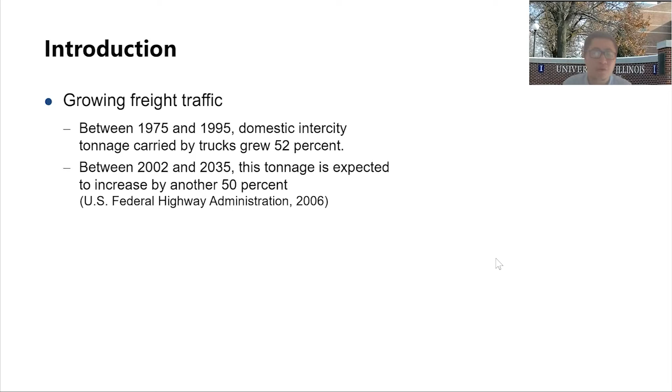We all know that freight is important, not only because it's related to our daily life, but because freight transportation has a lot of externalities. It does contribute to the congestion that we experience every day, and it has safety implications as well.

We see mixed traffic between trucks and other private vehicles, and particularly freight has a significant impact on infrastructure. This is something that's very distinct compared to other types of transportation, where freight vehicles are generally heavy and have a huge impact on infrastructure. The sustainability and durability of our infrastructure systems highly depend on freight transportation.

And of course, freight transportation is a major emitter of pollutants, and actually makes the most noise in transportation. So with all this, we want to have better freight systems in our lives.

Just to put things into context, we look at planning freight distribution networks. Generally, the freight transportation system serves the purpose of meeting supply and demand. Essentially, we try to bridge the gap in between over time and over space. This involves very often several layers of transportation.

One layer has to do with essentially the line haul part. Those of you familiar with logistics and freight planning would understand that it's often efficient to have a hierarchical system for freight distribution, where we use bigger or larger vehicles and more efficient modes to do the line haul part with long distance travel, which reduces the cost on average for overcoming long distance.

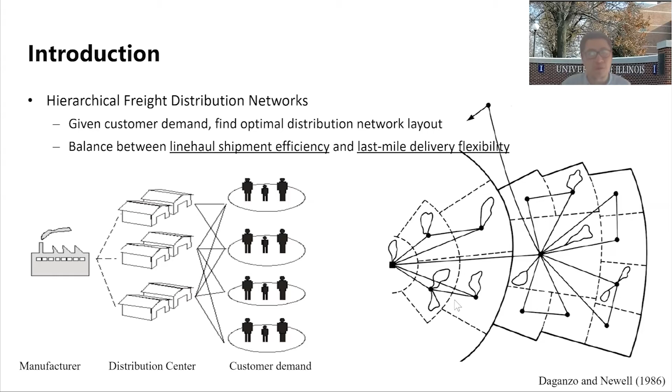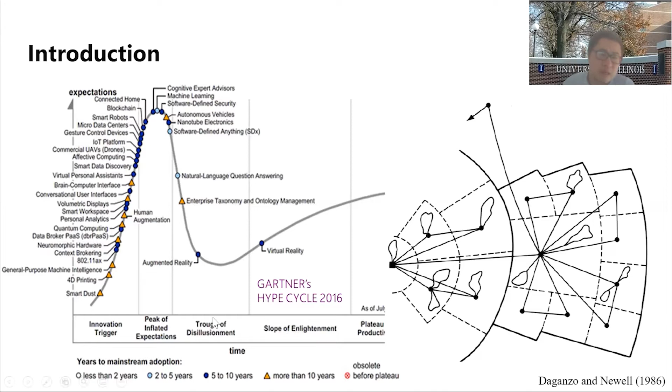But then there are the emerging revolutions and technologies that we've been seeing. There are a lot of technological advancements in recent years, and the freight industry is being revolutionized in a sense. We have technologies, for example very much related to our CCAT consortium here, such as autonomous vehicles being tested and deployed in the field now.

This particularly leads to revolution in the freight industry, particularly regarding autonomous trucks, and many companies are currently testing these technologies. Autonomous trucks, as we will see in a moment, have significant impacts on the freight industry regarding efficiency, sustainability, cost, and so on.

So this is one part of the system that we want to discuss here: essentially how this emerging autonomous trucking technology would have an impact on the line haul part of the freight distribution network, and how we are going to be able to design the freight distribution line haul part under the consideration of platoon transportation.

Then another part of the technology that's really having a direct impact, and that a lot of companies are testing, is commercial UAVs, or otherwise called drones. Using drones for commercial business essentially provides another way of delivering freight to customers, overcoming the last mile flexibility requirements.

And particularly in urban settings, when we have a lot of congestion on the surface streets, drones provide another way.

Particularly in rural areas, using huge vehicles to travel around to provide the last mile delivery is costly and inefficient, so drones provide a very nice alternative. These two technologies go hand in hand - they are not separate. There has been a lot of work regarding how we use autonomous trucks to do the line haul part, and together redesign the whole platoon and distribution network, such that we accommodate the emergence of drone delivery for the last mile. So this can be planned simultaneously.

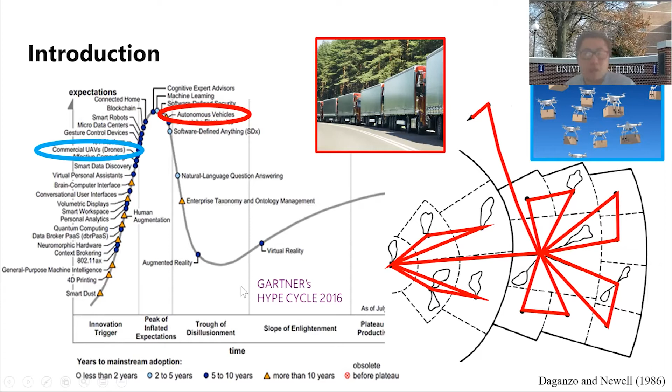This is the major focus of our discussion today. So a little bit about what we're going to do in the next half hour: we'll talk about the line haul part, how the research team here at UIUC has been working with everybody else to improve the line haul shipments of our truck platooning. I will start with a brief overview of the benefit and cost of truck platooning, some work we've been working on for a couple of years. Some building blocks were already covered last year in this conference, but hopefully that sets the foundation.

So we'll understand the benefit and cost of truck platooning, and then some recent work regarding how we plan the network of truck platoon lanes - essentially dedicated lanes for truck platooning, a network design model. To do that, we need to understand the generalized link cost function, essentially putting all the costs associated with platooning together into a unified framework, and use that as a building block for the network design. This is some of the work we've done recently.

Simultaneously, we've been doing some work about the last mile, the UAVs, and essentially the benefit and cost, some of the models we've been building, and particularly the energy analysis we've been doing. So this is the outline of today's work.

Next, I will briefly review some of the earlier work done by myself and my colleagues here at Illinois regarding the benefits and costs of truck platooning.

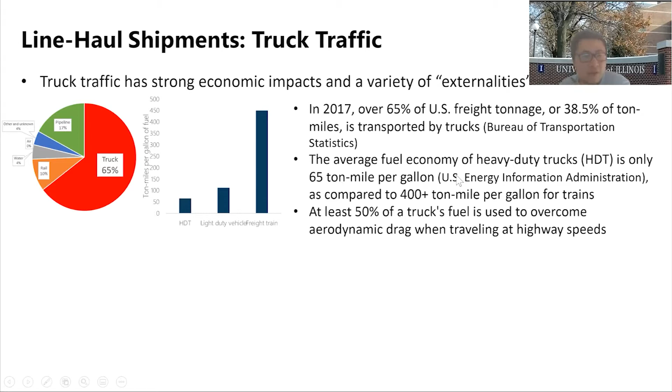Another thing particularly interesting about trucks is that they have a huge impact on pavement infrastructure - very different from passenger transportation. Truck traffic in the United States forms about 11% of traffic volume, but causes over 99% of roadway wear and tear. This is interesting because someone who took Pavement 101 would know that axle load damage to roads increases with the fourth power of the load value. So a 10-ton truck is actually 160,000 times more damaging than a passenger car - it's blown out of proportion. Trucks are the dominating factor for roadway deterioration.

So as you can imagine, as our freight continues to increase, one of the big impacts is on infrastructure damage.

We started looking at this problem many years ago at a conference, where local agencies near O'Hare, near their intermodal terminals, complained about how quickly their pavements get damaged by all the truck traffic near the railroad yards. Every 2-3 years they have to repave the roads because they get damaged so quickly.

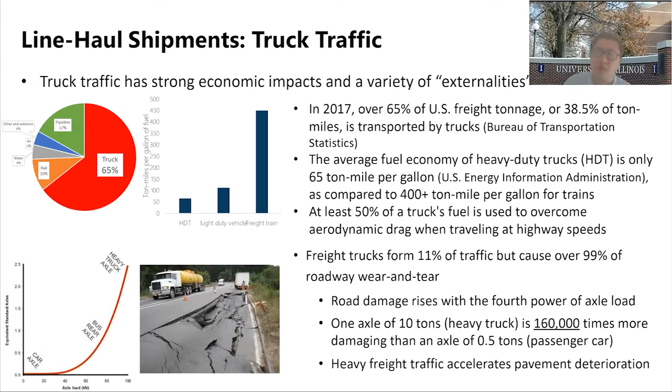As I hope this slide shows, there are two major factors we're going to be considering here: one regarding energy consumption related to truck traffic, and another related to the infrastructure damage truck traffic imposes on our society.

So a little bit about the revolution we're facing here. We all understand these impacts from truck traffic, but now autonomous and connected traffic is reshaping the landscape, particularly in the line haul part, where truck platooning is becoming an opportunity for us to improve performance—and potentially a curse as well. We'll talk about that in a moment.

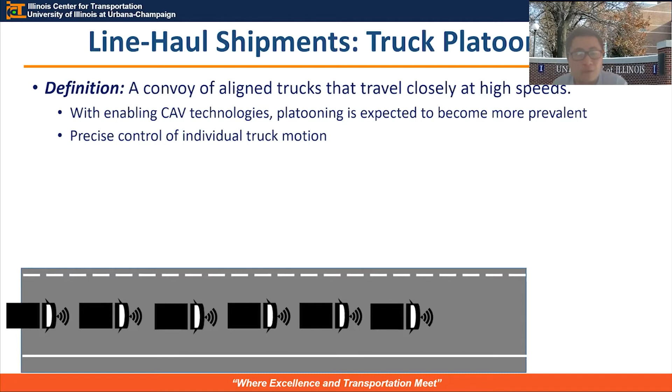Truck platooning—I guess everybody knows well what it means. It's essentially truck traffic vehicles getting together, with the help of information technology and autonomy, getting closer to each other with very close spacing and temporal gap or clearance. Then they travel together almost like a train. The benefit of this, obviously, is first of all that we can do it—we now have the capability of putting trucks together in a very close range, compact convoy, and they can travel at a higher speed.

Without human intervention or human error, traffic actually gets improved in some sense. As you can imagine, vehicles still travel at a very high speed even if density is high. This defies the traditional fundamental diagram where we'd normally anticipate people slowing down when they see a lot of traffic around them. So this is one potential improvement we see, and there are also safety implications from that.

But another particular benefit from truck platooning is the potential of lowering fuel consumption and emissions. This is due to aerodynamic drag—when vehicles form almost like a compact train on the freeway, the air drag gets reduced.

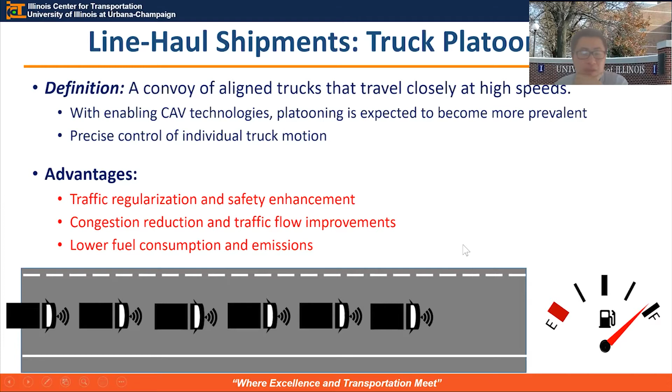This is some of the earlier work we did almost 2 years ago, regarding how we can understand the impact of trucks forming a platoon, and how energy consumption depends on the spatial gap between vehicles—our spacing between vehicles, and also potential lateral displacement. If vehicles form a perfect convoy with perfect alignment, there's a certain air drag. But if there's some lateral displacement, what is the air drag then, and how does it change according to the location of the vehicle in the platoon?

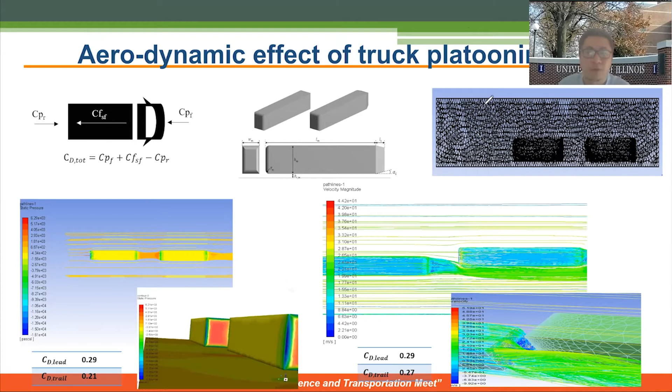So we built finite element models to try to understand air drag, sort of a fluid dynamics modeling here. This is earlier work we did 2 years ago, and we were able to put things together to understand this—I hope I have some animation, but maybe it's getting slow.

Essentially we try to understand, under any arrangement of trucks in a platoon, how the air drag depends on the organization, or configuration, of the platoon—how much spatial gap we have, how much lateral displacement we have, and how large the platoon is, meaning how many vehicles we put in one platoon.

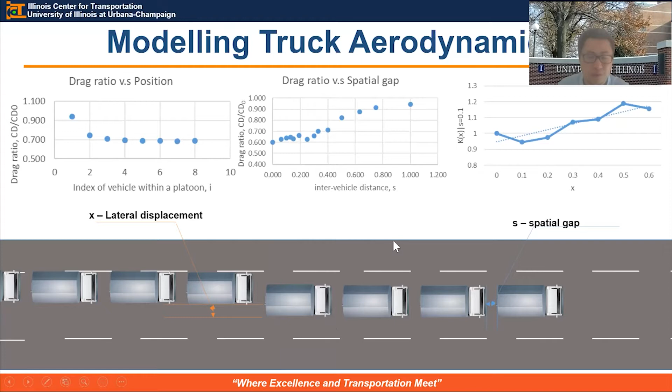So this is one part of the analysis we did—a review of earlier work. We found out, from the literature and also from our own research, that there is a significant amount of fuel saving opportunity from truck platooning. This is great because, as we said, air drag is more than 50% of fuel consumption for trucks, and trucks are a big consumer of energy in industry.

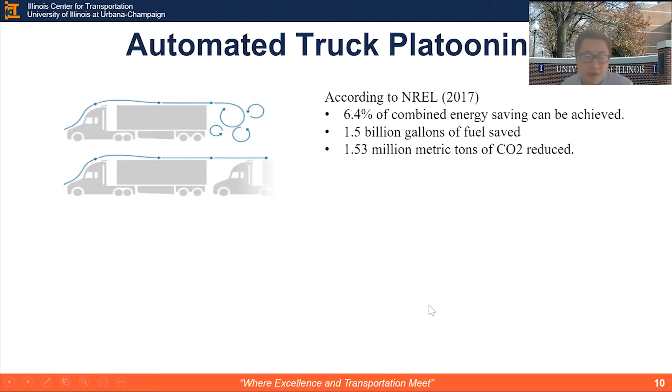But then there's no free lunch. I think platooning actually has the advantage of energy saving, but it does have damage to the pavements. As you can imagine, the damage accumulation depends on the loading frequency and loading concentration. This is a picture to show what we may expect in the future, especially when platooning is really widely accepted.

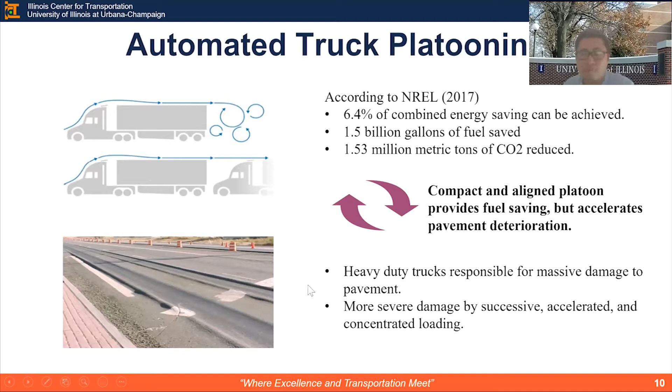If we are not careful, the pavements get damaged very quickly. This shows very significant rutting along the wheel paths of trucks. So our colleagues in pavements have already been doing a lot of work in the past two years to understand the impact of truck loading patterns on the pavement, particularly in light of autonomous trucks and platooning, compared to human drivers.

With human drivers, we cannot really tell the drivers to stay even inside the same lane, so laterally the loading points are going to be a random distribution. The truck can be anywhere in the lane.

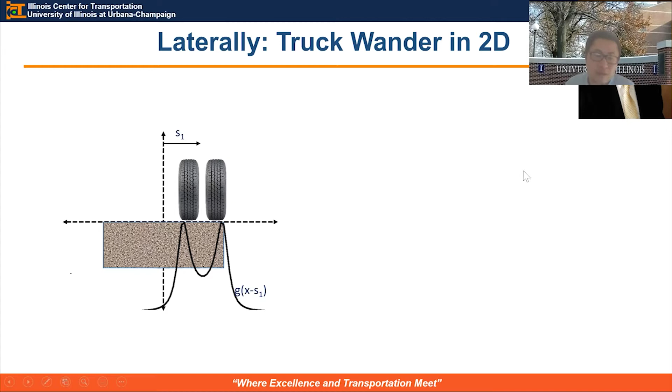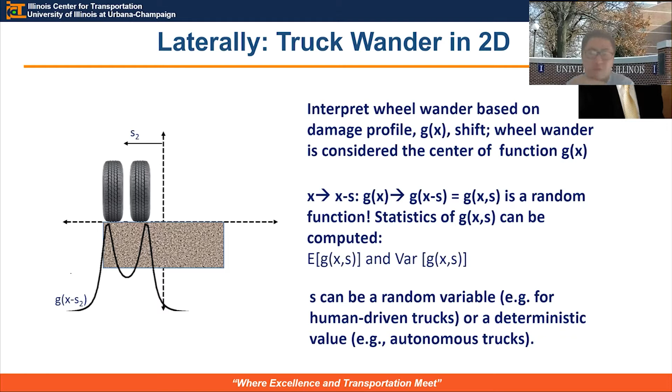But with autonomous and connected trucks, we actually have more precise control of where the lateral loading points are going to be. Dr. Al-Qadi and his students worked together to understand, under different loading patterns and lateral displacements, under different schedules and frequencies of loading, essentially how close each truck is, how compact the truck convoy is. They developed finite element models to understand how the loading of trucks in a platoon impacts pavement damage accumulation over time and space.

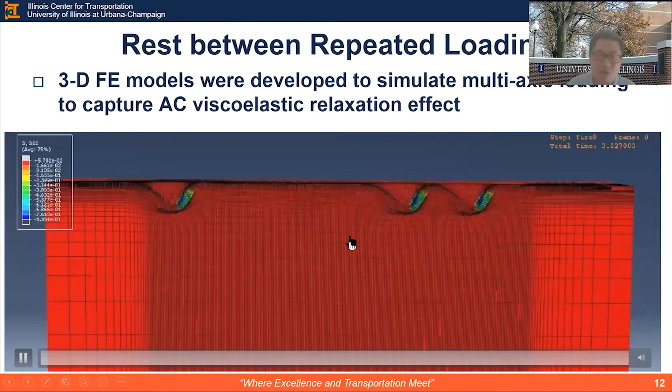So essentially this helps us understand the damage to the pavement. Our colleague Hassan Ozer has also been particularly focusing on this—research we've done in the past year or so—regarding how, as trucks get closer to each other and travel at higher speed, the loading frequency gets improved. But actually that's damaging for the pavement, because the pavement no longer has time as a viscoelastic material to relax and recover from the load.

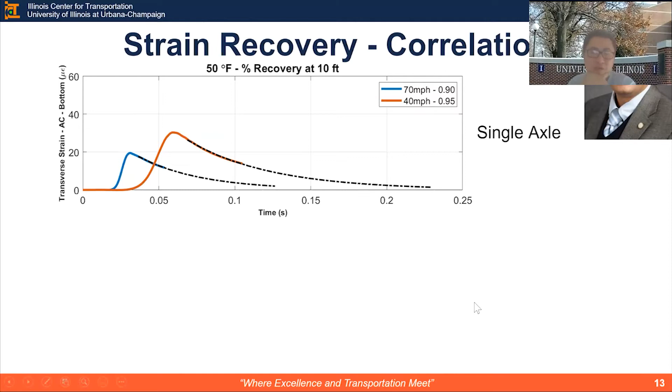This more frequent loading from platoon trucks is essentially going to cause faster damage to the pavement due to reduced recovery time. They've done both modeling and experiments to try to understand these impacts.

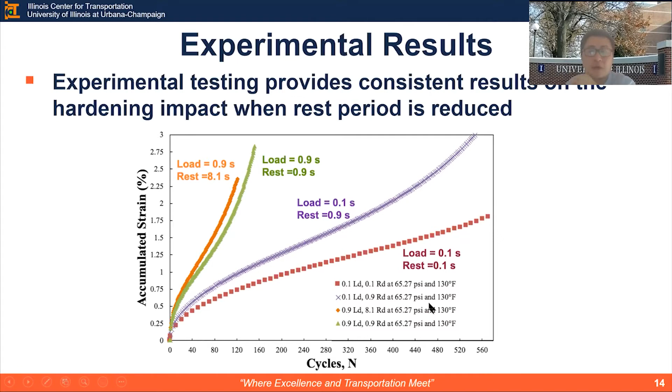And then finally, my colleague Jeff Roesler—I think he made a presentation earlier more about this work, so I'm only going to have two slides here to talk about what he did. He has been particularly focusing on how we can build new types of pavements, embedding instruments inside the pavement to help platooning, so that the infrastructure can communicate with a vehicle as it passes by.

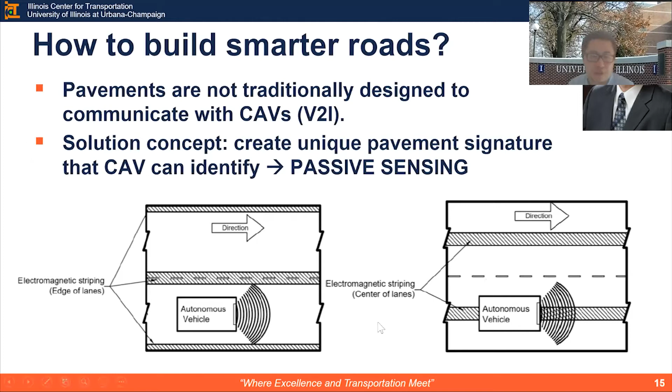This is just to show a bit of what he's doing. He put electromagnetic signatures in the pavement so that vehicles, when they pass by, can have certain guidance. His work in the lab really gave us some ideas about how, if we were to convert existing pavement lanes into truck-platoon-capable ones, and how much the conversion would cost. So we get data from them through this work.

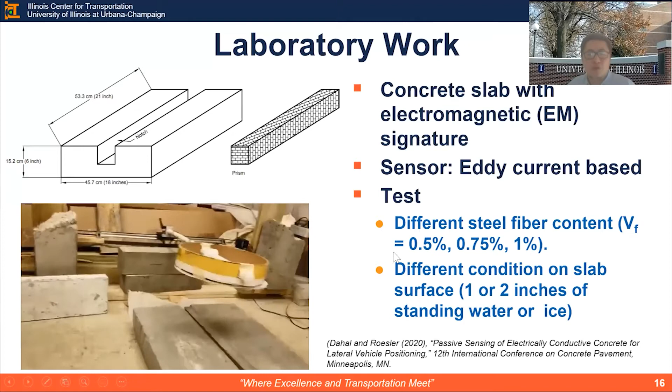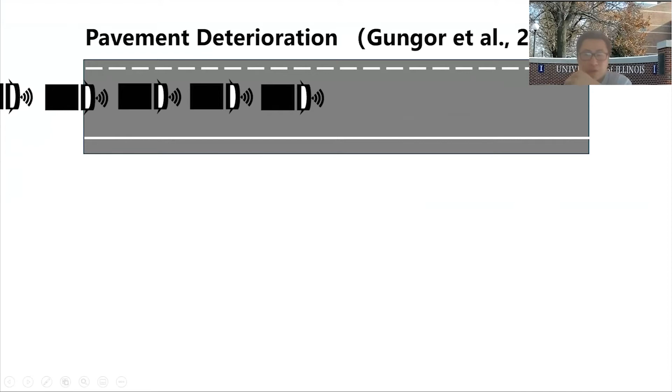With all this work from my colleagues, what we were trying to do is get a complete understanding of pavement deterioration under truck platoons. For any truck loading pattern configuration, we're able to understand the progression of distress development and how the pavement is going to deteriorate, giving us this deterioration function.

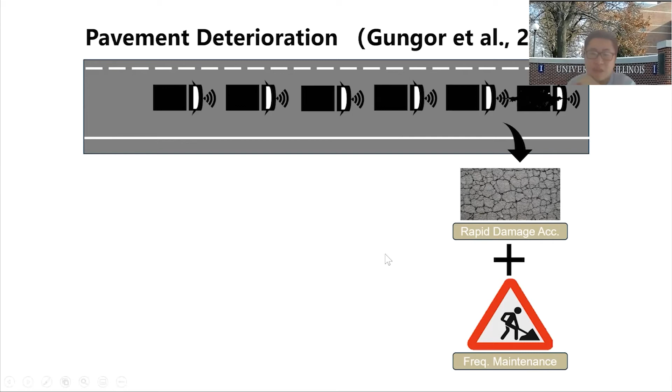We'll be able to put this into a pavement management model, so we can understand how we must do maintenance in order to maintain the state of good repair of the pavement facilities. Together with this, we understand that pavement condition and air drag—remember, fuel consumption—have an impact on the user cost.

So just talking about all these things together, we're able to put all these components together into this pavement lifecycle cost and actually system-wide lifecycle cost assessment framework. We are able to understand essentially how platooning, with or without platooning, then how much is actually really the life cycle cost implication of what we do.

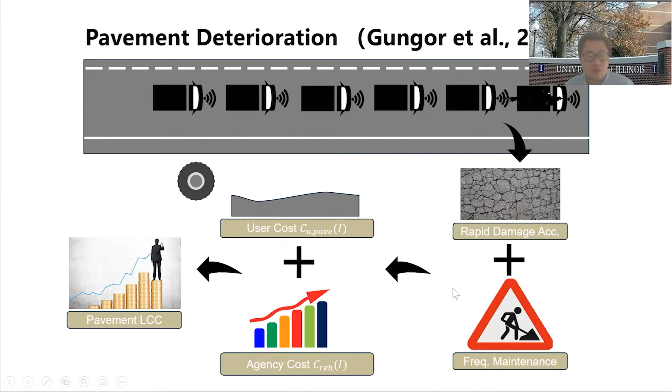So what we do here now, so far we have been talking about the review of a previous work. Some of these slides have been covered in the previous year, but now in the past few months and almost a year, what we were doing is trying to put all these pieces together with our better understanding of the energy efficiency and better understanding of the pavement impacts. We're trying to put together and see how we really can utilize all this information we obtained from our team's research.

We're trying to develop and plan the infrastructure or the network for line haul shipments, and particularly to accommodate truck platooning. So this work is particularly trying to build a network design model to try to see where in an interstate highway network we can actually build dedicated truck platoon lanes. I'll talk about why we dedicate truck platoons in a moment, but generally this is the type of infrastructure where the platooning benefits could be maximized. Anyway, we'll see that in a moment.

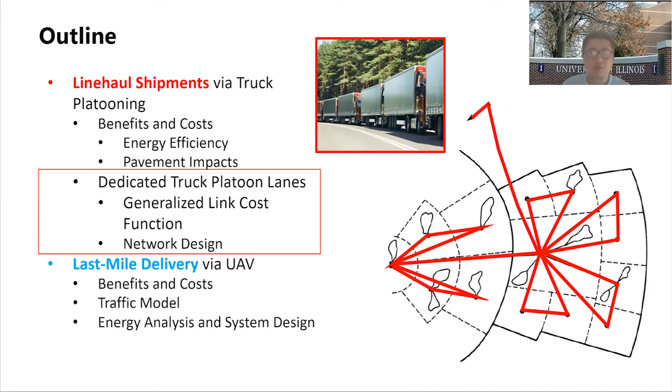So with all the research that we have been reviewing earlier with the work from our pavement colleagues, and regarding air drag and so on, we were thinking about how the system is going to work in the future with truck platooning capabilities. What we are trying to think is that we would like to in the future allow a certain highway link to be essentially converted into a truck-platoon-capable link.

Essentially, we were thinking about how we can actually, for any given traffic flow pattern, find out the best way to do the truck platooning, such that we minimize the overall cost, the life cycle cost regarding the energy consumption and the infrastructure impact.

So what we're thinking first is maybe the public agency is going to come up with this sort of truck platoon configuration, where periodically the highway agency is going to look at the condition of the network regarding the demand and the pavement condition and so on. Then they will come up with a plan regarding a certain roadway link, how the link is going to be operated, and what type of platoon configuration is going to be used.

And meanwhile, the agency is going to actually do pavement management, regarding the rehabilitation and repair of the pavement as traffic becomes intense. So the current setup is the following.

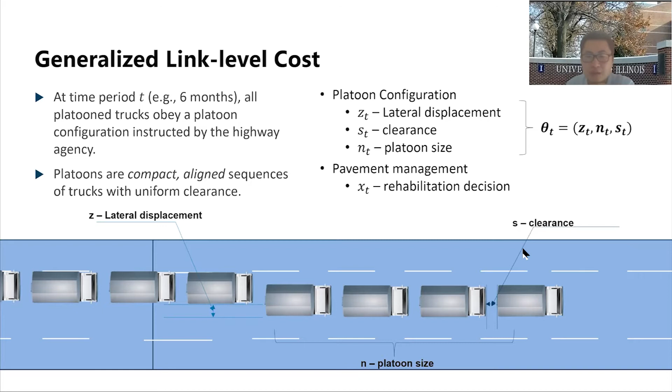So we can partition the lane we build for truck traffic into multiple discrete displacements, and the trucks essentially form a cyclic pattern as they travel. One platoon is here, another platoon goes there, and then they rotate. Essentially we have one platoon going like this, another going like this, another going like that, cyclically, then we come back to this side and do this again. So this is our assumed truck platoon operation plan.

This operation allows the pavement to have a rest period in a way. We have a platoon adding load to this area, and then the next platoon goes somewhere else, letting the pavement here rest a little bit. This is essentially the strategy we propose here.

This platoon configuration is going to be described by the lateral displacement, the clearance—essentially the absolute distance between the trucks—and the platoon size. We use the theta vector to indicate that. We assume this type of control of the platoon is like a directive to the industry: if you want to use this lane to do platooning, in this period of time you follow this guideline. Somehow we find a way to organize the traffic through the control. So this is one part of it.

This platoon configuration could change over time. Every period of time we can actually change it, and if we consider this over a long period in the life cycle of a pavement, this becomes the platoon configuration schedule. You can imagine the configuration changing from 6 months to another 6 months because the pavement has been damaged a little more, so maybe we should change the platoon configuration, and so on. So we consider this as something we can change over the life cycle of a pavement.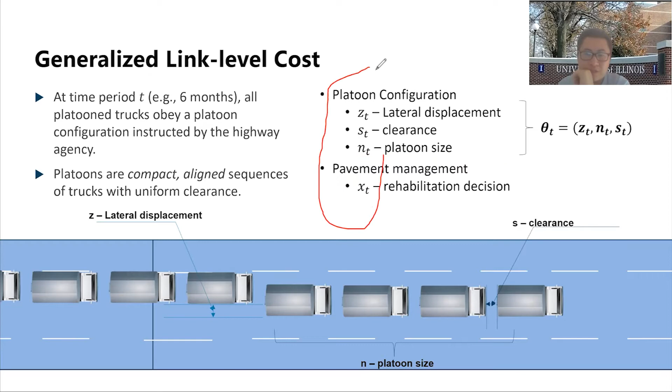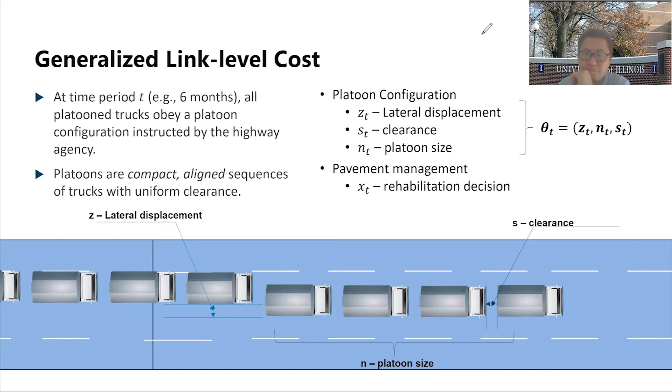Overall, these are the decisions we can make every 6 months or so regarding how we're going to run the traffic and control the deterioration of the pavement and then repair it. With this, we put it into our understanding of pavement damage propagation and energy as part of it. We assume every pavement facility, every roadway link, is running under a certain traffic load and platoon configuration.

For any of those we're going to optimize, we use components from earlier work by my colleagues regarding the pavement 2D model—understanding how, under a certain truck loading pattern, the pavement deteriorates over time. We also understand from my colleagues how resurfacing and reconstructing pavements impacts the pavement and how much the cost is going to be.

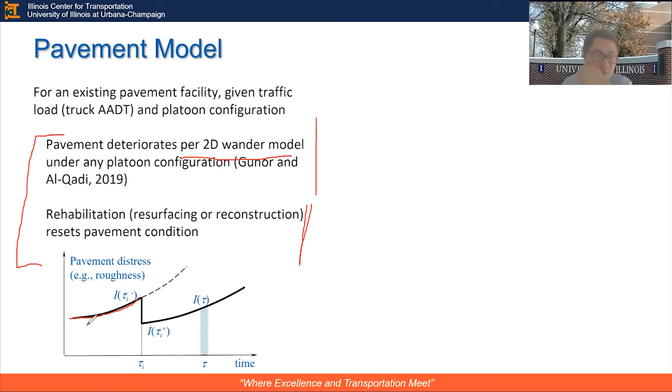In terms of pavement management, we're continuously dealing with the impacts of user cost. User cost has to do with the pavement getting worse and worse, and there's cost associated with several parts: vehicle wear and tear, where users have to pay extra if the road gets rough; energy consumption, as discussed earlier regarding air drag under certain platoon configurations; and also delay cost, when there's a lot of concentration of vehicles inside the lanes.

And then the agency has to pay the rehabilitation cost of the pavement. So essentially the decision every year, every 6 months, the agency has to decide what type of truck platoon configuration to use and what rehabilitation schedule to use. So this is essentially the problem we have.

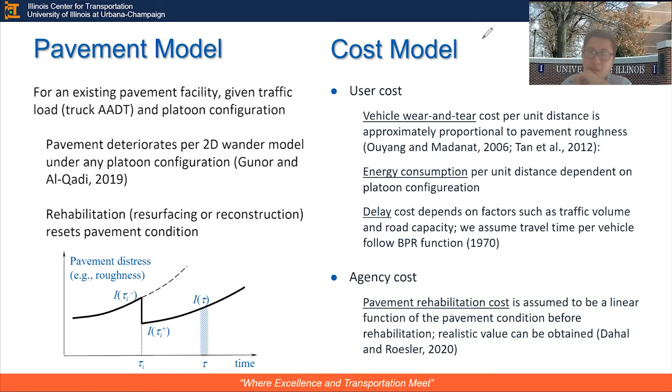And then this problem is actually not that difficult. It turns out to be a simple optimization problem where we try to minimize the life cycle cost of the system over the lifespan of a facility, and this includes the cost associated with wear and tear, with pavement rehabilitation, and with energy consumption, and all the things we talked about earlier. We can put them into this big framework.

I'm not going to bore you with the details of the math, but essentially we have all these models coming from my pavement colleagues who developed them. For those of you on pavements, they have the mechanistic empirical pavement design guide, which they modified to allow us to understand how pavement deteriorates under certain loading patterns and everything we do. So essentially, with all these black boxes from our colleagues' work, we were able to put them together into this framework and allow decision making regarding platoon control and pavement rehabilitation.

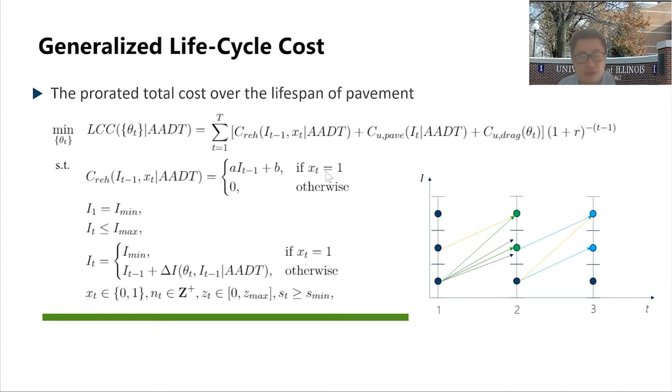So with all those boxes ready, the problem itself is quite simple. As those of you familiar with this know, it's generally a dynamic program type. You can see we have a time horizon, multiple decisions, and some schedule to optimize, and essentially, I'm not going to bore you with the details.

Essentially, we can define the stage decision epoch to be every 6 months, or every 3 months if you want, and the state can be the pavement state, and the action would be the platoon configuration and pavement rehabilitation decisions, jointly optimized. Then the problem becomes a fairly straightforward Bellman equation. We can define the value function and rewrite the optimization problem to be stage-wise. So that's what we did.

Actually, it's very simple, we were just really integrating every component together here. With this, what we did is we were actually trying to understand what all the cost implied here is. When we have a certain roadway link running a certain truck traffic, then how much is the cost going to be per vehicle, in a sense, or per user.

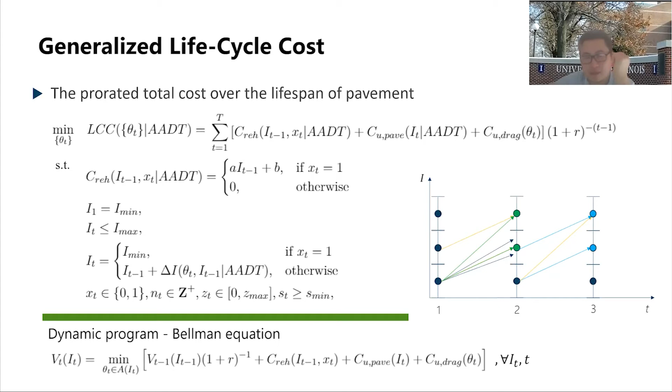Now the interesting part, there are several things. We are able to apply the dynamic programming framework for every AADT, every traffic flow representation. Under that traffic flow, we optimize the lifespan of a loading pattern and so on, doing a planning model obviously. Then for every traffic volume, we try to do the best platooning configuration, and the best rehabilitation of the pavements, and get the cost per traveler as a function of ADT.

Also interestingly, this link cost function is quite interesting. I want to point out that there's a part about the agency cost, essentially how the agency pays for the rehabilitation of the pavement. There's also some cost associated with users paying for the wear and tear, and roughness — regarding the wear and tear, when the pavement gets worse, the vehicle depreciates faster. And then finally, the air drag cost regarding the energy consumption as we operate in such a condition.

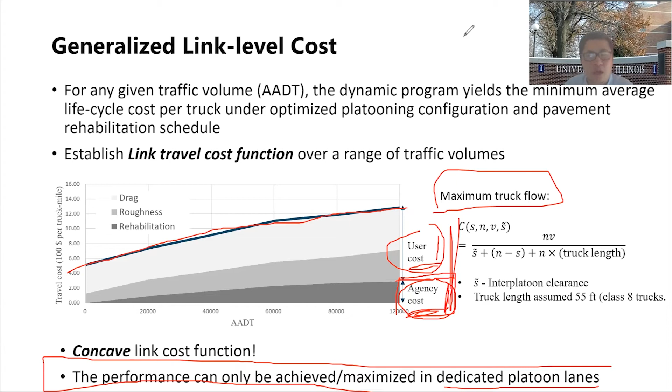So what we're going to do next is look at how we can design dedicated truck lanes to try to maximize the benefit we can get from truck platooning.

So here we are going to be looking at a network design model next, with the understanding of the link cost function, the new link cost function we characterized with all those components. We're now looking at how we can design or plan the next generation of our truck platoon lanes in the freeway network.

Essentially, we are looking at where to locate dedicated truck platoon lanes, how to redistribute the benefit and the cost, and what type of user fee we need to use to try to have a win-win situation.

We understand that whatever decision the agency makes regarding truck platoon infrastructure would have an impact on the traffic in the transportation network, and this will interact with the general public, as we said.

We also want to mention that autonomous trucks and shippers can choose not to use platooning. They can still drive the trucks as they wish, as with human drivers. But we provide this opportunity to let them do platooning in the network, and this will interact with the traffic.

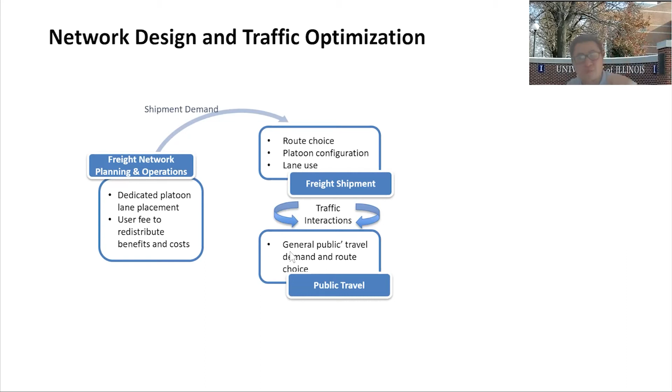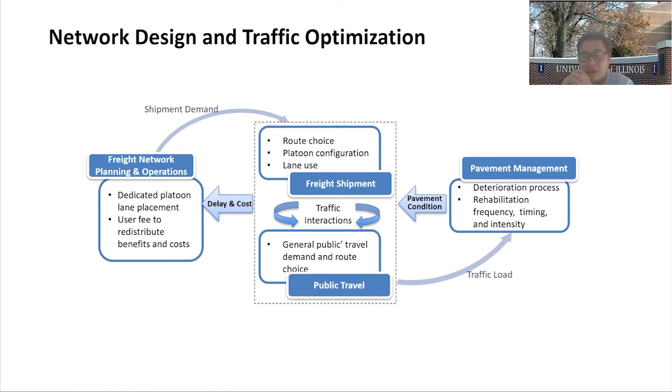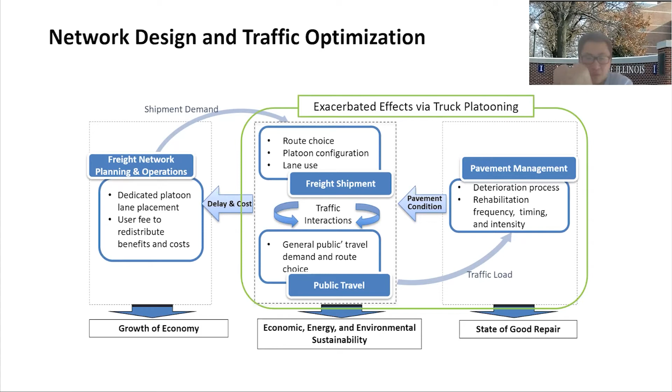Then we understand all this truck traffic is going to have an impact on pavement deterioration, and all those cost components I already discussed earlier. Then all this is going to have a feedback loop on traffic and freight efficiency. This obviously has a lot of impacts on the economy, on sustainability, and also on the durability of our infrastructure. With truck platooning, this is a significant problem.

So we build a network design model. It's a pretty straightforward network design model, so I will only quickly talk about the concept. Suppose we're considering a problem that the state DOT, or maybe the feds, would be interested in knowing: we have a transportation network operating right now in a state.

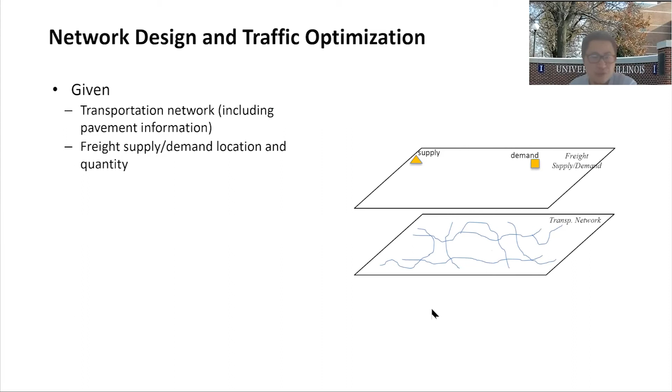The question is that we have freight traffic that's given to us, and we need to serve it. Currently we also have public transportation demand that's also sharing the transportation network. Then the decision we have is where we could potentially try to add platoon lanes to the transportation network, such that we give an extra option for truck traffic to get out of the mixed traffic and do platooning.

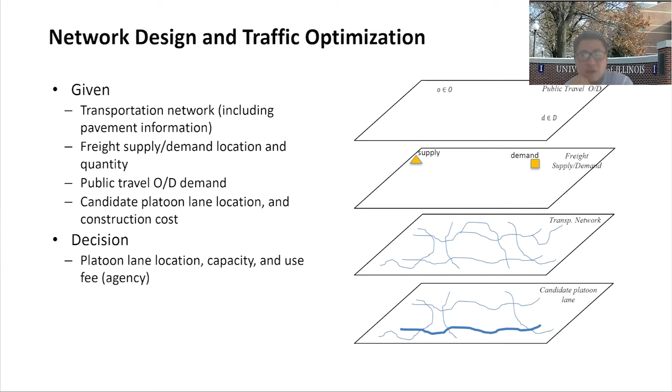This last layer of the network is essentially either new additions of lanes, or conversion of existing lanes. So then where do we do that?

We also want to understand how freight traffic should be routed, how public transportation should be provided and should use the network. Finally, we also simultaneously consider the pavement rehabilitation plan, to maintain the state of good repair in the network.

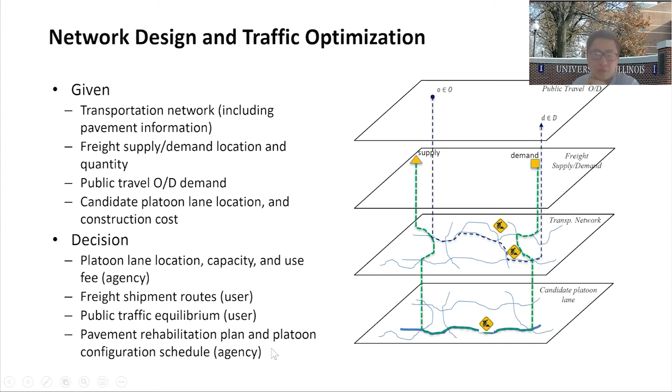So again, this slide I will skip, I think it's just standard.

Those of you familiar with network design will recognize this as a standard bi-level model, with agency decisions at the upper level, and then user decisions regarding whether to use the routing, and the carriers and shippers deciding which route to use, whether to platoon or not on every link when there's an option.

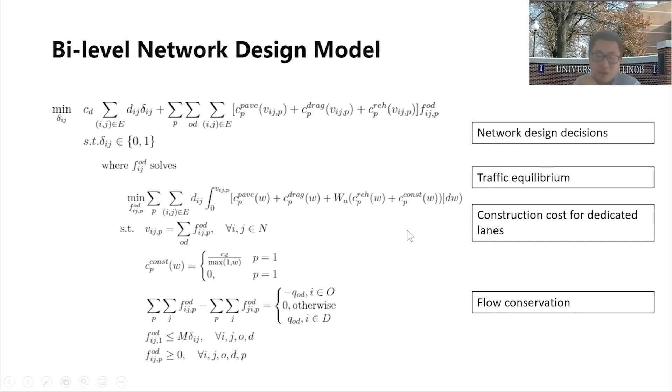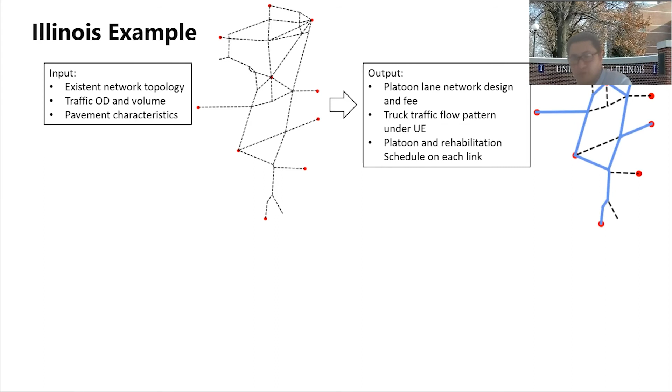Just a quick showing of examples. We actually have the Illinois example as a test case here. This is the Illinois freeway network. We know the network topology, current infrastructure, traffic, and pavement design information everywhere. We put all the components we discussed earlier about pavement and traffic together, and we were able to apply the network design model to inform decision makers about where, given the cost and budget, we should actually be implementing truck platoon lanes.

We will also be able to use our model to do sensitivity analysis, for example, to see if the cost of actually constructing or converting the lanes increases or decreases in the future, then how would the different costs change? I hope this makes sense.

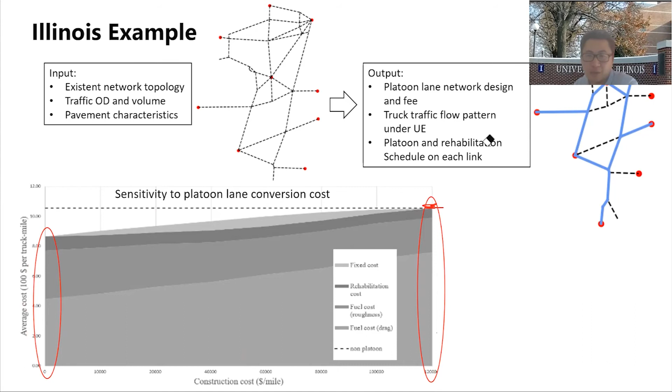For agencies, you can look at what is my cost of converting the lanes. You'll get the breakdown of the costs. But if you compare the cost of the left-hand side and the right-hand side, I have a little summary here, and there's an interesting insight: when we don't do any platooning, the air drag is really higher compared to when you do platoons.

But you'll see that the pavement cost actually does increase a little bit, moderately, slightly, because platooning does have an impact. But with systematic coordination and a systematic design, we will still be able to save cost overall by about 20% for this particular case. Of course, every state is going to be different and the situation will change. So this just gives us a little bit of confidence that the potential work here could be used to save long-term life cycle cost for such systems.

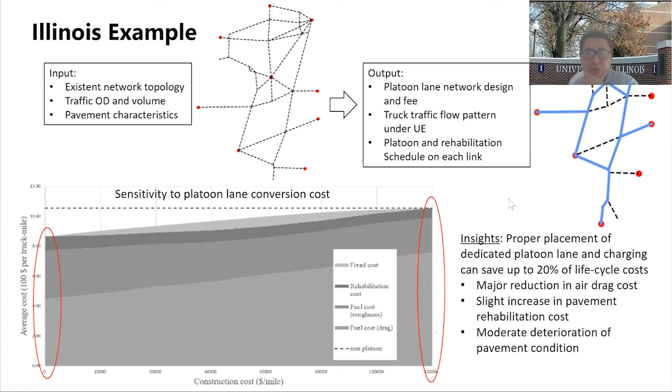Another part of the work we've actually been working on for a couple of years, three to four years now, through various sources, but also we were happy to integrate this with our CCAT effort, is actually how we understand the impact of last mile delivery by drones and how that's going to have an impact on the freight delivery system.

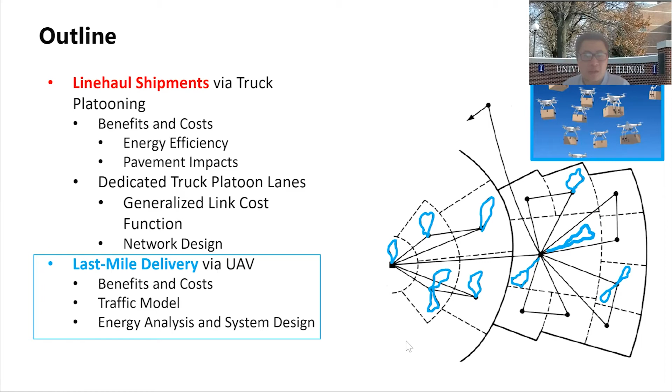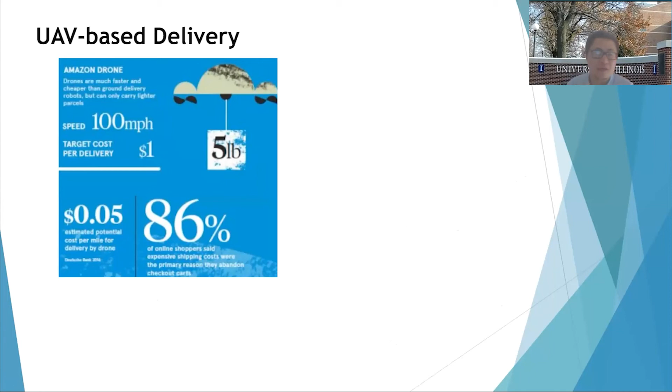Since my time is limited now, I'll just mention that freight delivery, last mile delivery by drones, is actually becoming a reality, maybe. It's actually happening. Amazon has been testing it for years, and almost every freight carrier is testing some sort of technology in this direction. It turned out, and it may be surprising to some of you, that for short distance deliveries, using drones could be cheaper than other means.

This is again for short distances, within 10 miles of a delivery, for a 5-pound package. Amazon drone's target is $1 per delivery cost. This is considerably cheaper, relatively, than if you were to drive a big truck or delivery van and route around the neighborhoods to do the delivery. So this is some interesting results we have.

With all this, another benefit of drone delivery is that we now utilize 3D space, rather than surface transportation. We can go across rivers fairly easily. We don't have to be limited by geographical barriers and so on.

But drones, UAVs, also have shortcomings. One of the shortcomings is particularly regarding energy efficiency. Essentially they need big batteries and cannot carry heavy loads. Amazon only tested 5 pounds. Anything heavier than that might be a problem or a challenge.

There's also limited flying heights and range. So even though we go from surface to 3D, the flexibility we have is also limited. In the future, as drone delivery becomes commercial or full scale, there are going to be a lot of drones flying around in the neighborhood, and there will be concerns, at least regarding congestion in the air.

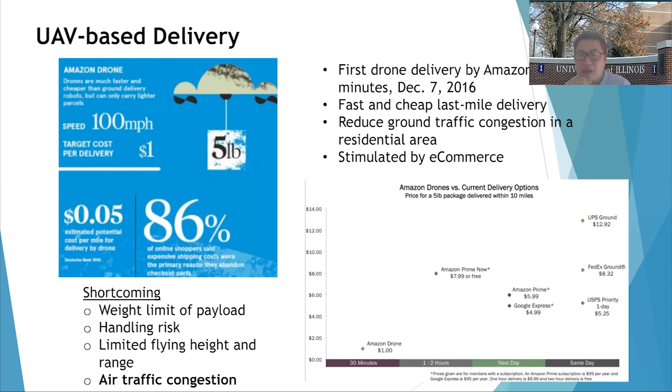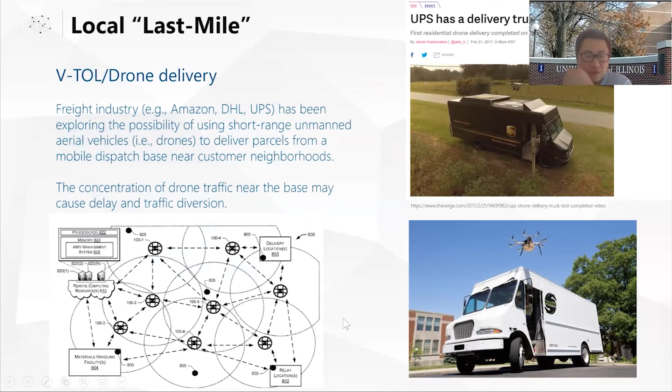There have been different studies regarding how we should use this. Different companies are trying drones, and Amazon is trying floating warehouses, a warehouse flying on top of the air of a city, from which drones get dispatched. The benefit is that the freight is loaded to a certain elevation through this floating warehouse.

And then with a payload, the drone only has to go down, which is more cost and energy efficient. When the drone tries to come back, it's empty. Amazon actually patented this idea to try to partially overcome the shortcomings of UAV-based deliveries.

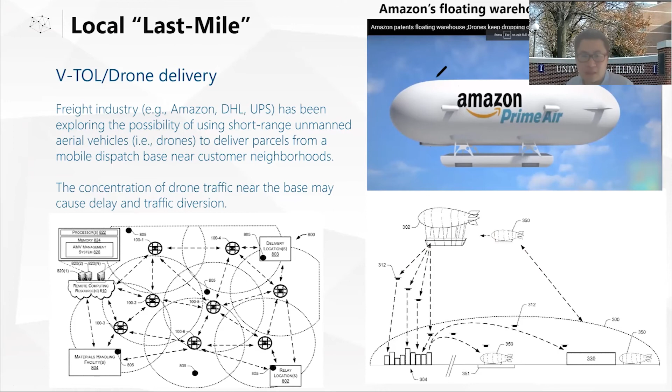All these things have been tested. But what we are trying to do is really understand what is the optimum layout if we were to cover a city's last mile. Imagine trucks or Amazon floating warehouses going around the city, and how the drones should be dispatched, and how we should figure out the exact way to cover the whole city. These are the research questions we were trying to address here.

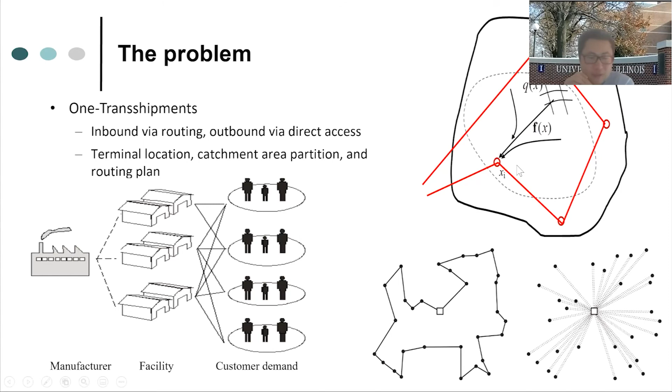A little bit about the model: interestingly, drones now travel not in a lane, but in a continuous space. We build continuous traffic equilibrium models where we allow the drones to fly like water, flowing in continuous space, and we try to figure out how each drone finds the optimal way to travel around.

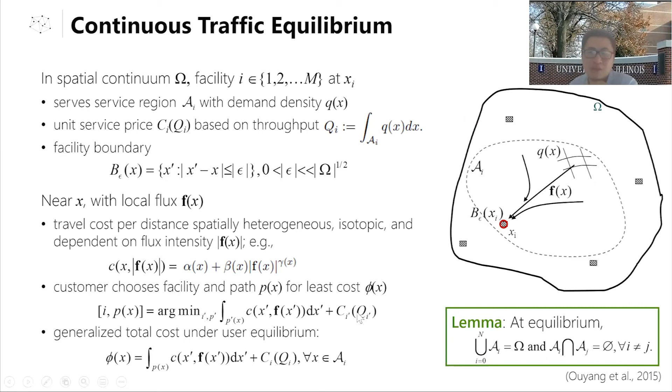There is also a congestion effect. If too many drones concentrate in a neighborhood, they slow down, so we allow concentration to impose congestion on the drone traffic. The drone traffic, the KKT condition for the user equilibrium, can be described in equivalent form as PDEs, partial differential equations. We have models to describe that.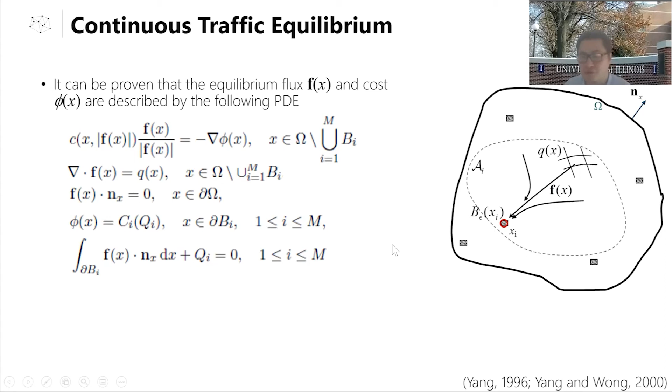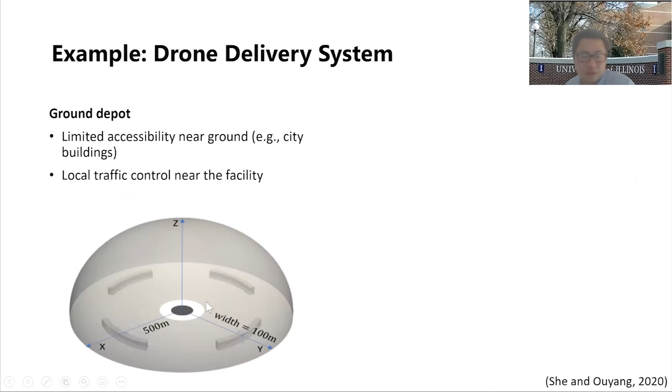We were able to study last mile delivery from fixed depots, or from ground-based trucks, and how that can be done. Looking at traffic patterns, you probably cannot see the arrows showing the optimal path very well, because there's congestion and the drones no longer travel in straight lines. They actually try to avoid each other and travel around to do so.

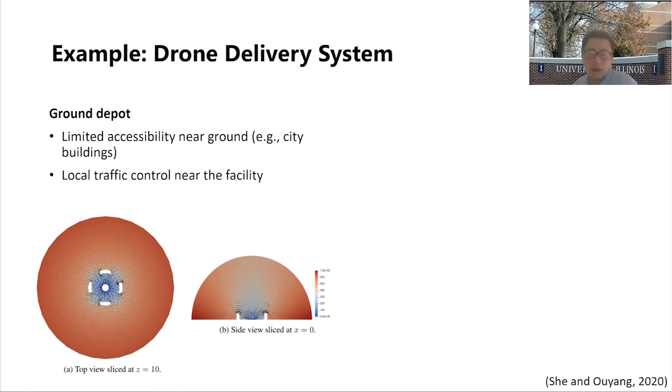We also consider the Amazon fulfillment center, the airborne floating warehouses, building models where the destination is on the ground, and look at how the traffic is routed. Some drones have to go higher than the floating warehouse just to avoid congestion in the bottom part of the airspace. We have models to understand all these things.

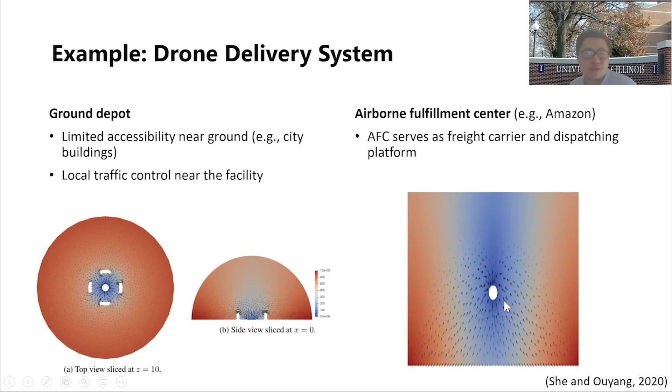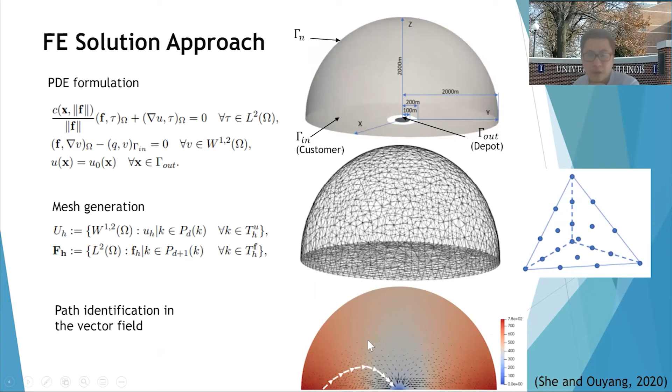And then just a little bit for those of you who are interested in math, we have the PDE formulation. We come up with the domain, we come up with a finite element mesh, and then we have all these elements. We actually will be able to solve the PDE and find the travel path as a vector field, like how water is going to flow in continuous space, and that's optimum for every individual drone.

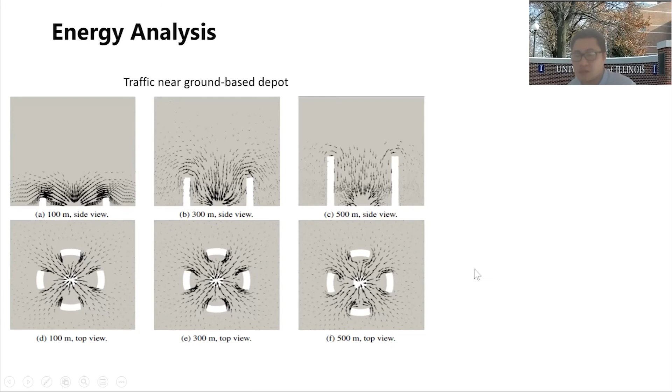With this, we are able to actually test, for Amazon or for any company, the last mile delivery, and how, if the city has different barriers, we mimic the buildings near the urban setting with different values, we will be able to evaluate exactly what is going to be the congestion, the cost, and the efficiency associated with different settings of the city, and exactly how the drones need to go from everywhere to everywhere in order to minimize cost and energy.

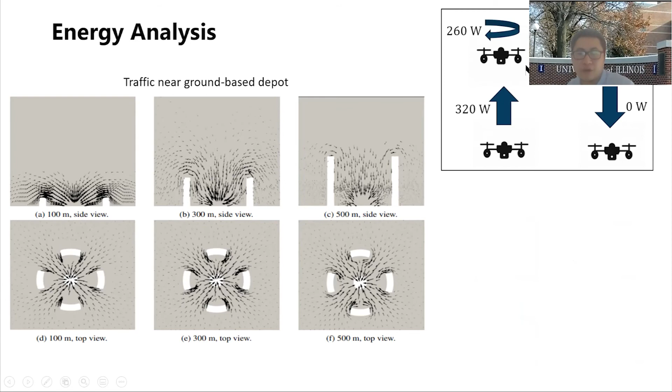Then we will be able to extract that information with some understanding of how drone energy consumption is going to be related to time, essentially the power, when they are doing different maneuvers. So if the drone is empty, ascending, descending, hovering, or moving horizontally, we have some numbers about drone energy efficiency, and with a payload, the efficiency, and so forth. Then we will be able to estimate based on the traffic we got from here.

We know exactly the exact movement, so we would be able to do line integrals in a sense, right? Each part we can map to some sort of drone movement here. Then we will be able to estimate the energy consumption for the drones exactly along the path. With this, we will be able to estimate the efficiency overall.

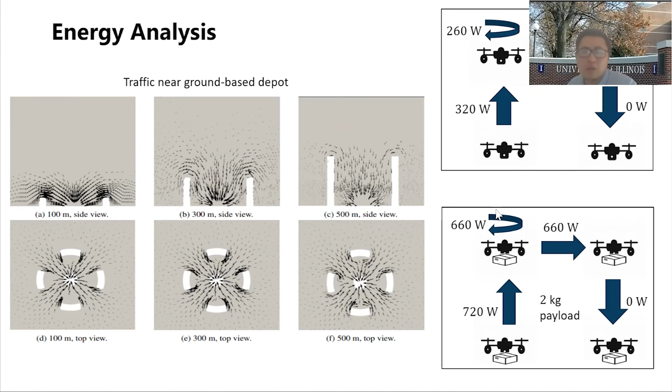So I hope this makes sense. Essentially, we were able to do different types of energy analysis under different scenarios. But eventually, what we do is we will be able to play around a little bit with different designs of the system.

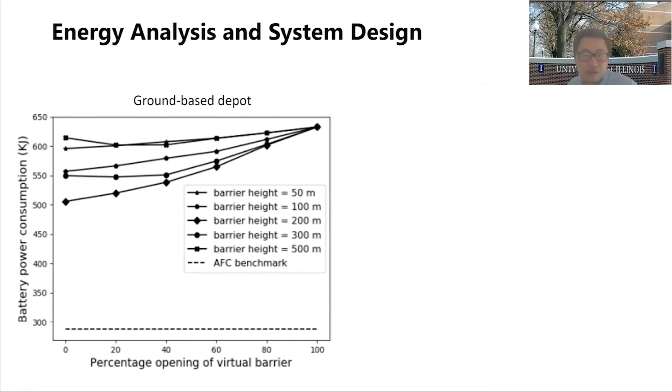For example, Amazon might be curious about if they were to use floating warehouses, airborne fulfillment centers, how high this floating warehouse should be above the air. We notice that if they fly too high, energy consumption could be bad, because there's less congestion, but there will be a lot of free flow travel time in a way that the drones are covering too much distance.

Or otherwise, if the floating warehouse is too low, there's huge congestion in the near ground space. So either way, we find there's a certain optimum, this data is not to advise Amazon quite yet, but just to give an example, there's a certain height that the airborne fulfillment center should follow in order to minimize overall efficiency loss.

And actually, there's also a comparison between the AFC versus ground-based travel. Remember, the AFC already has the load going up, loaded up in the air, so there's energy savings. We are able to evaluate how much is saved by the AFC, how promising it is as compared to ground-based delivery. So this is some of the implications we could actually draw for decision makers.

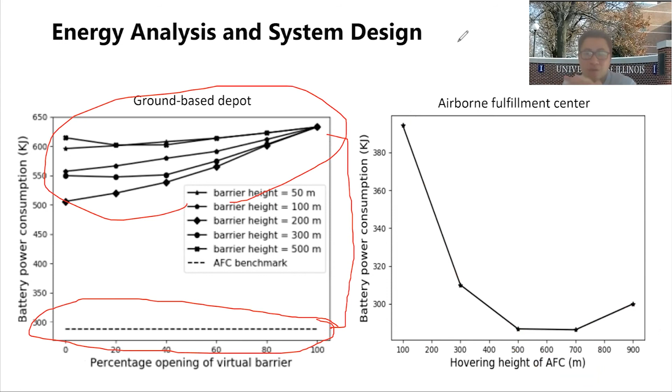Last slide, I think. With all this work, then where am I going? We are actually currently also considering not only the freight. This is the last slide, I want to say that our consortium here, our Illinois colleagues, has been mostly focusing on freight deliveries, but we also want to mention even for the UAV, sort of air flying cars.

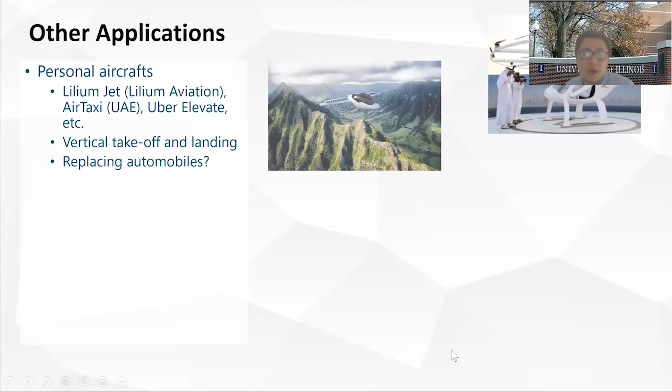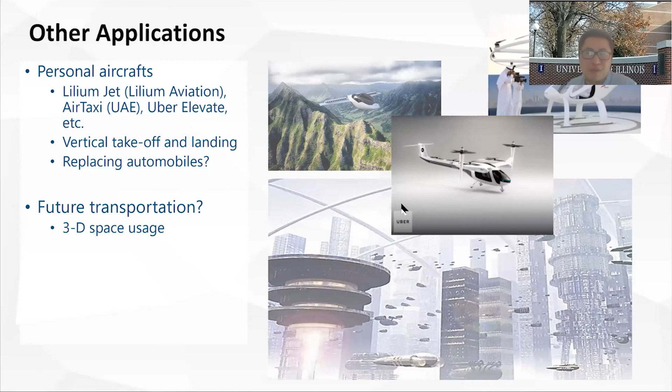This has actually been tested around the world, including Uber. And then maybe in the future, our work would contribute not only to freight, but also to passengers. In the future, maybe you will not be actually limited by the surface roads and lanes and so on. You will be just flying all over the place. So our model would hopefully be helpful in that regard. With this, I think I conclude my presentation, and thank you very much for your attention.

Thanks, Dr. Ouyang. Why don't we go to the question from Dr. Hu? Can you briefly touch base on the state of the practice of autonomous truck implementation and testing?

Are we getting close to seeing fully autonomous trucks on the road? I see. Thank you, Debbie.

Thank you, Dr. Hu, I think that's an interesting question. Actually, your answer is probably as good as mine in a way. We have been following the news as much, and we have been in contact with the industry. There are a lot of tests being conducted in the field, in Arizona and in different places. We think it's actually coming, and honestly, I think maybe freight and heavy vehicle automation—that's my personal opinion—may actually happen earlier than passenger vehicle transportation, because of all kinds of reasons, including the difference in payload. That's my personal guess.

So I think it's probably coming, and it will be sooner than the passenger side of things, in my opinion—the freight side. So we are sort of in anticipation for its arrival, but I apologize, I cannot tell you a timeline because I'm not an expert on that. But I think it's coming, and it will probably be the first part of implementation.